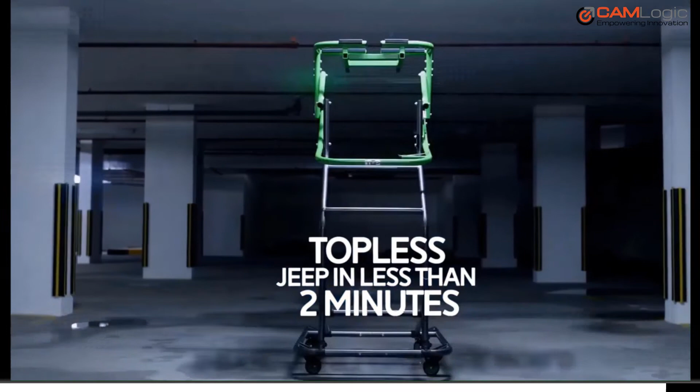To make this process less tedious and less time-consuming, I found this really great product that allowed me to essentially remove the hardtop in less than 2 minutes and then easily store it in my garage, all by myself. If you live in an area like me, where the weather can change daily, this is a great product to have flexibility in how you want to ride.

As many of you may have experienced with other products you've purchased, often you have a choice on the type of documentation you want to utilize in putting products together that require assembly. Today, you often have the physical, in-the-box hard copy documentation, or you can go online, usually on a mobile device, and utilize the digital version of the instructions. Those digital instructions can be either a copy of the physical manual, or you might even have video instructions from the company's website or even YouTube.

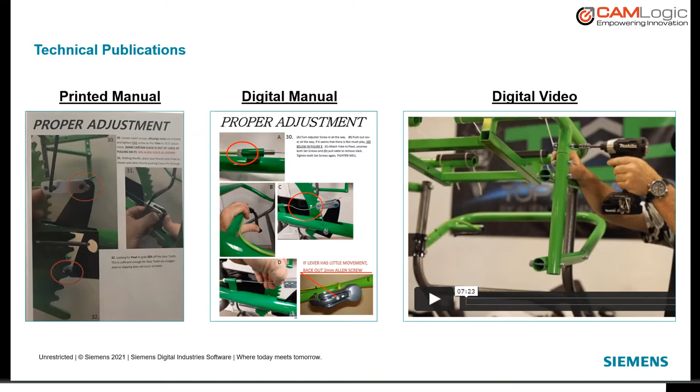And what I found was in this instance, I had access to all three. Unfortunately, each one was subtly different. If you look closely between the first two images shown, you can see that a design change was made in how the user adjusts the mechanism. It just so happened the version of the instructions I initially chose to follow were out of date, causing quite a bit of frustration during portions of the assembly process.

What happened in my situation is quite common. Oftentimes companies, in order to speed time to market, start the process of creating technical documentation earlier so that it will be ready when the product is ready. But changes made during late-stage design or change requests made during manufacturing can often result in differences between the product and its documentation.

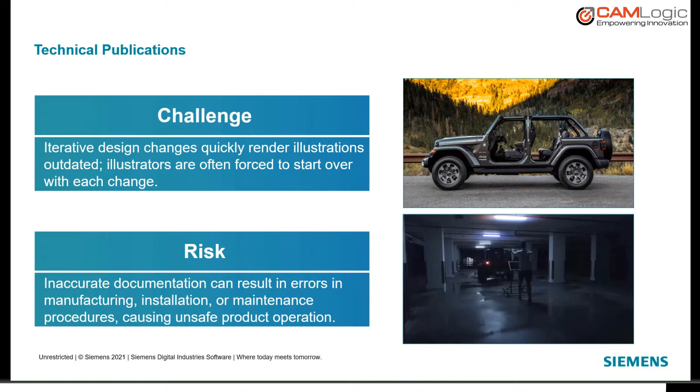For today's presentation, we want to start with some of the challenges that many companies face in creating technical publications. From there, we will briefly cover the digitalization portfolio that we offer with Solid Edge. We'll then take a deeper look with a demonstration of Solid Edge technical publications and how it interacts with Solid Edge CAD data. Finally, we'll cover the potential ROI of the solution, followed by a sample customer case study, and then wrap up with a Q&A session.

From a Siemens Digital Industries Software perspective, our customers are harnessing the power of digital technologies and the digital twin to transform their businesses. The digital twin means to design and test your products in a virtual world on the screen and correct your mistakes there long before you begin the manufacturing process. The value of the digital twin lies in how closely the virtual meets the physical world. And in today's competitive market, let's understand that a true digital twin is not an option, it's a necessity.

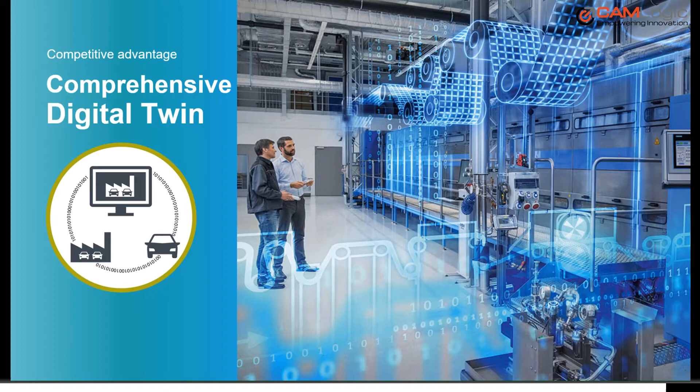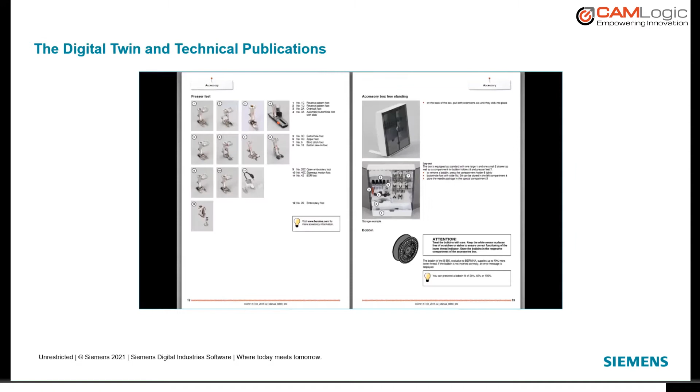Manufacturers are recognizing that clear, accurate images of parts and products are the foundation of high-quality downstream documentation. The challenge is it needs to be extremely high quality, but also done quickly. Unfortunately, quality and speed are often competing, sometimes to the detriment of a company's reputation and bottom line.

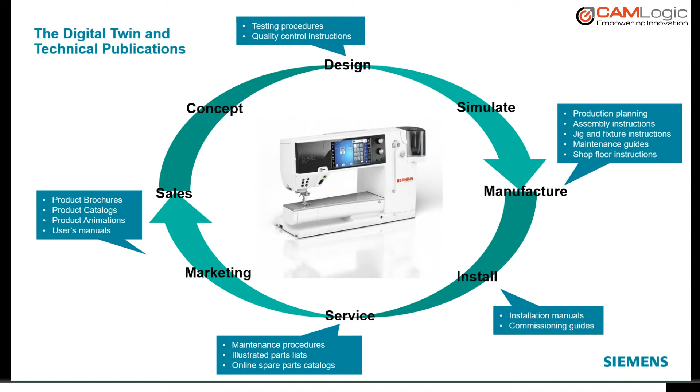And documentation is not relegated to just the design process. It's also necessary for manufacturing, installation, and maintenance procedures. In addition, the need for proper documentation for sales and marketing or in customer use is also critical and essential, not just for the performance of the products, but also for the overall success of the business.

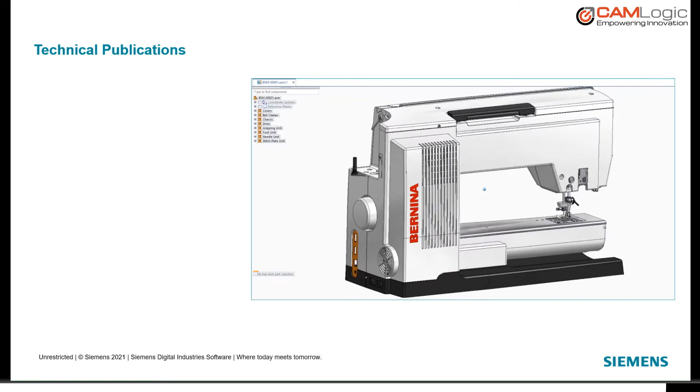The good news is for most parts and assemblies, 3D digital models are created as part of the product development process in the form of computer-aided design or CAD files. Unfortunately, converting those 3D CAD files into technical documentation can be a painstaking process that takes time and expertise.

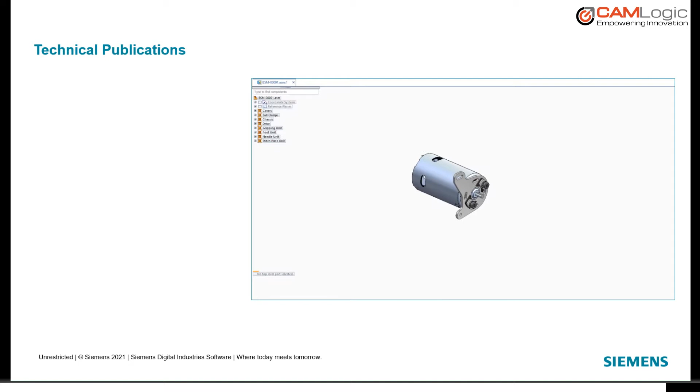The task of converting files and managing additional files for documentation purposes usually falls on the busy designer. Sometimes, instead of converting the files, the designer provides bitmap screen captures of CAD images with a specific orientation to be used as is or recreated by illustrators. All these projects take designers away from their day-to-day work.

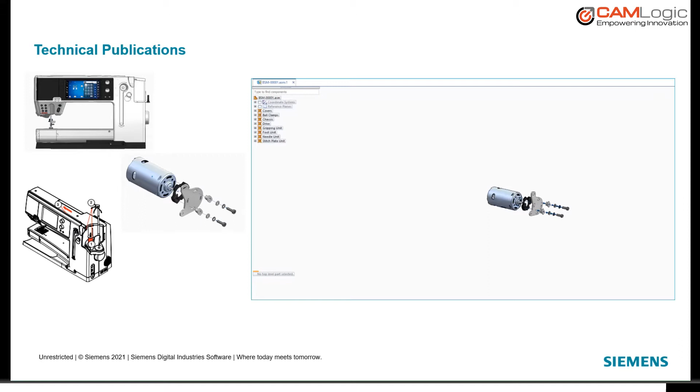To save precious engineering time and as an alternative to converting CAD files, some manufacturers are still taking photographs of a physical prototype to create graphical content. Of course, this means the prototype must be manufactured first.

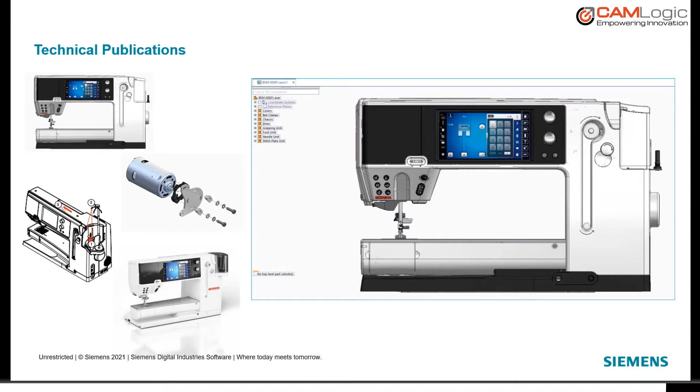While 3D models are an accurate source of product information, creating documentation is often one of the last steps in the product development lifecycle because of the need to ensure documents accurately reflect the final design of the product. But since the process of creating documentation can be so time-consuming, ship dates can be held up by documentation.

Ready-to-ship products sitting on the shelf because they are waiting on required documentation frustrates the design team as well as customers. Getting to market quickly can mean the difference between a competitive edge and lost revenue. And meeting customer milestones for product delivery can mean the difference between a profit and contractual fees.

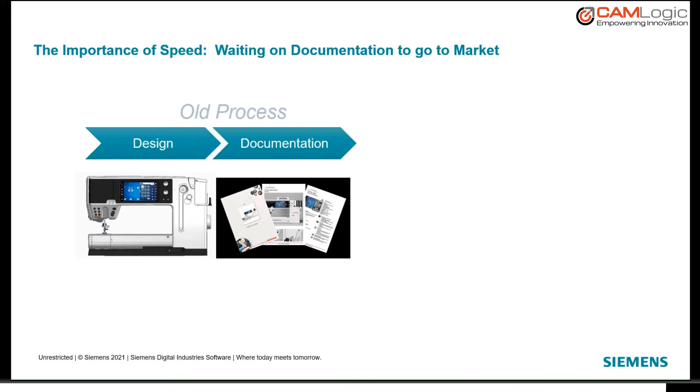The goal, however, is to have the ability to build publications and other documentation in tandem with design, and not only to build in tandem, but also to keep them associatively linked. This offers manufacturers several advantages: illustrators have more time to detail their work, and they don't need to worry about a design change down the road invalidating everything they're currently doing.

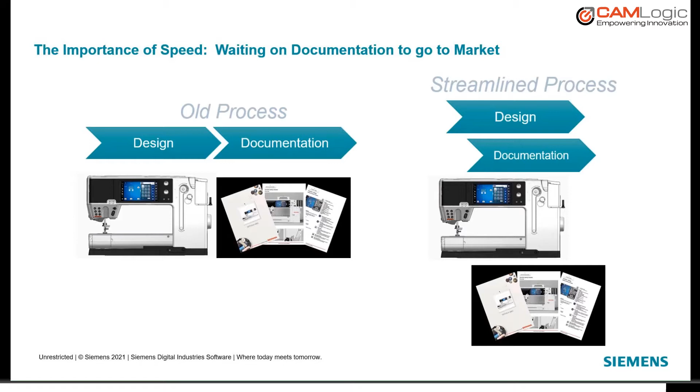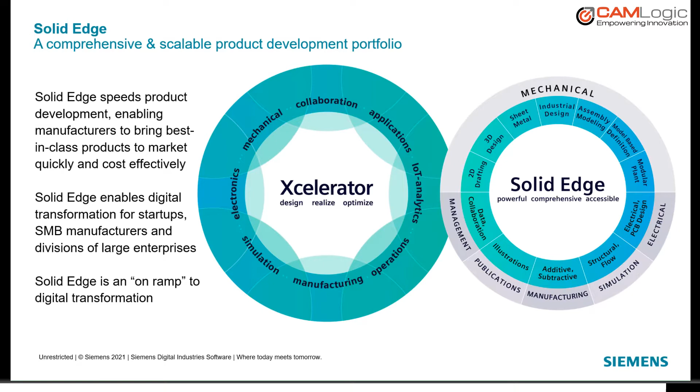Solid Edge is a key part of the Siemens Xcelerator portfolio and is focused on the requirements of small and medium-sized manufacturers. Solid Edge enables manufacturers to create a comprehensive digital twin of their products and includes solutions for mechanical design, electrical design, simulation, manufacturing, and as we're discussing today, technical publications. It also facilitates collaboration both within manufacturing companies and with external resources, including suppliers and customers. Solid Edge is the on-ramp to digital transformation.

Solid Edge Technical Publications offers a wide array of various capabilities, from single-page illustrations to entire sets of documents including interactive 3D views, text-based instructions, and Excel-style charts. Solid Edge Technical Publications allows customers to deliver customized documents, all while providing users options and flexibility on how they wish to work.

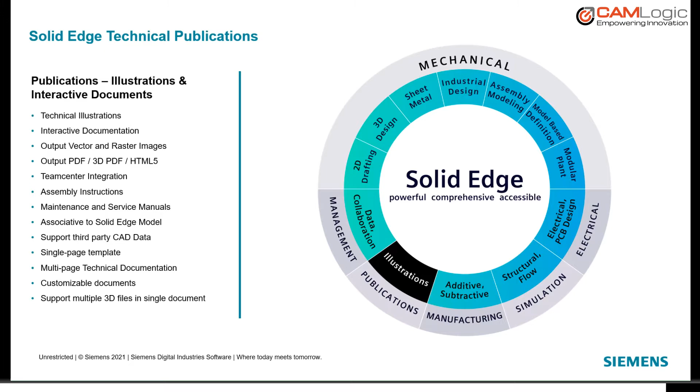In terms of workflows, Solid Edge Technical Publications is very flexible in how content is both created and accessed. Both Solid Edge users as well as non-CAD illustrators have the ability to easily create documentation. For the situation where the CAD designer is also the one creating the documentation, Solid Edge Technical Publications can be launched right from within the CAD interface. For non-CAD illustrators, Solid Edge Technical Publications can be launched outside of the CAD environment.

If access to CAD data is available, illustrators can insert it on the fly. If CAD data access isn't available, illustrators can still create documentation by opening a unique file that can be generated right from the CAD data.

Over the next few minutes, we're going to show the many advantages of Solid Edge Technical Publications. We'll start by showing the seamless flow of information from the CAD design right into Solid Edge Technical Publications. From there, we'll show the flexibility in taking that data and creating different types of documentation. We'll also demonstrate how changes made to the CAD data during late-stage design or change requests made during manufacturing are

automatically updated and reflected in the documentation. Finally, we'll show the end result of the final published documentation and the interaction the end user has in consuming the information in easy-to-read interactive formats.

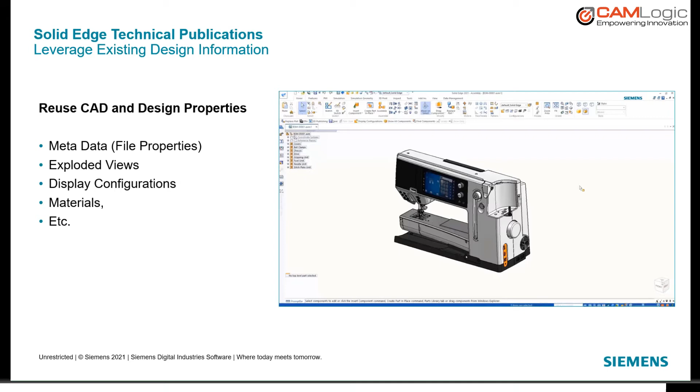Because Solid Edge Technical Publications automatically pulls features from the CAD information, engineers don't have to convert files, and illustrators don't have to manually recreate that data, which can include metadata, exploded views, display configurations, and more. This design information all flows seamlessly from Solid Edge to the Technical Publications tool.

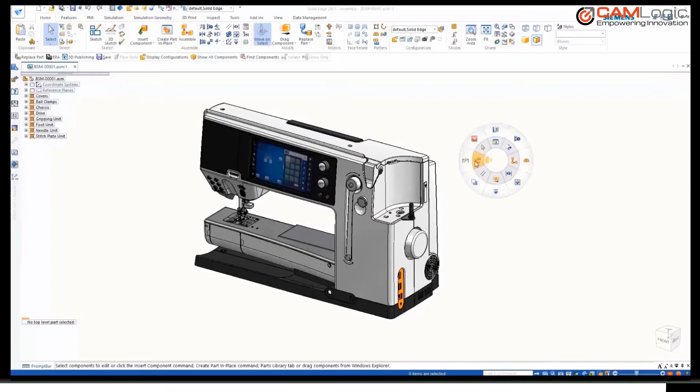Let's take a look at this sewing and embroidery machine designed in Solid Edge. Within the Solid Edge design application, saved views or display configurations make it easy for the designer to access what they need instantaneously without having to navigate through the component pathfinder. For example, if the designer wants to focus on the main frame and turn off the outer plastic components, they can do this quickly by selecting it from a shortcut.

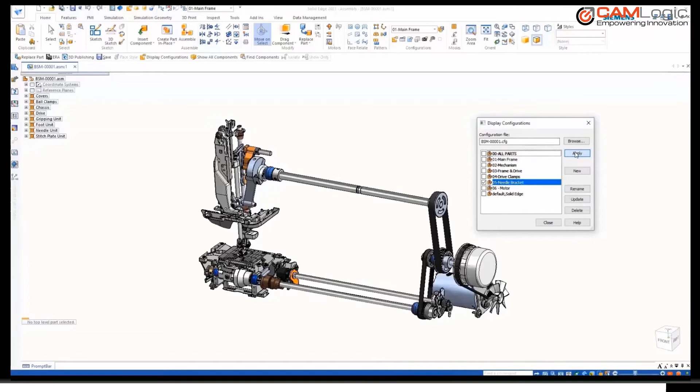Or maybe the designer needs to look at the motor for a specific task. More specifically, the designer can see the motor in its exploded state to see hidden parts or verify the order of assembly.

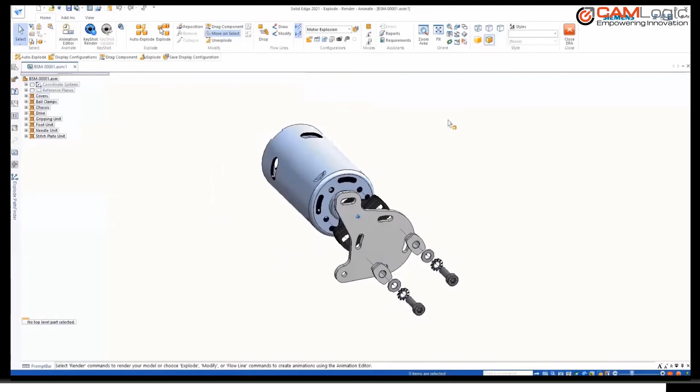And while these tools are important to the designer, they're also just as important to the person creating the documentation.

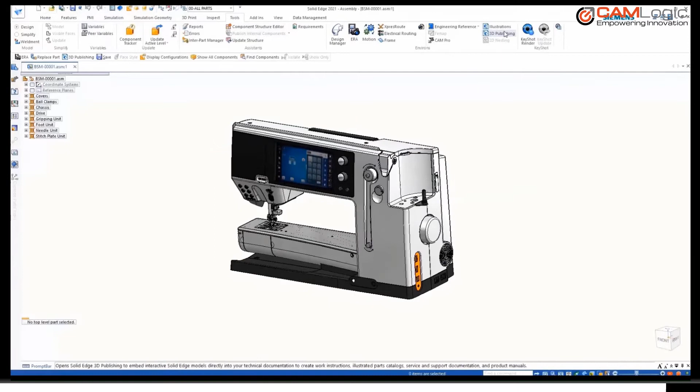We mentioned earlier that the task of converting files and managing additional files that must be created for documentation purposes usually falls on the busy designer who created the original CAD files. Solid Edge Technical Publications can be launched right from within the CAD interface. You'll notice all the display configurations we just looked at in the Design tool are available to access. In the case of the motor, you can see both the assembled and exploded states.

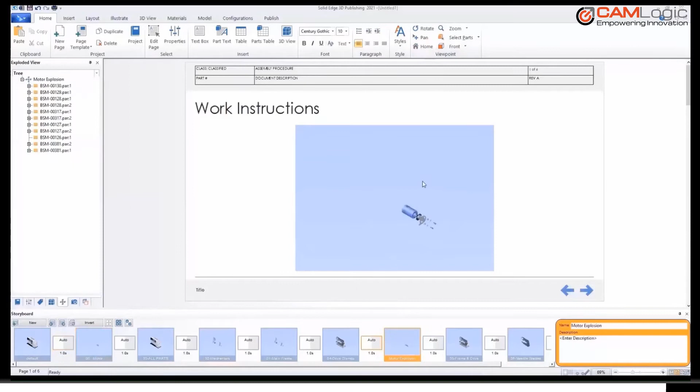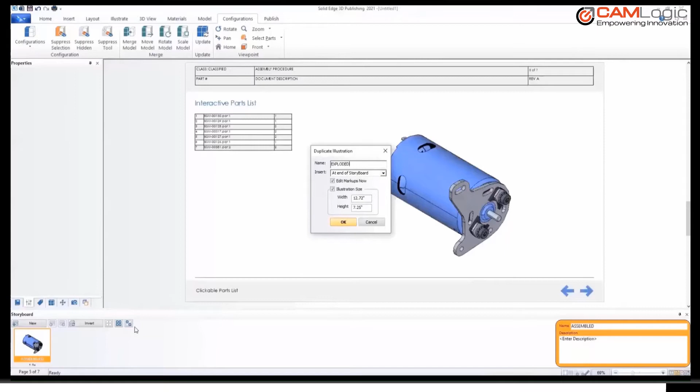Because Solid Edge Technical Publications is template-based, it is very easy to access predefined views or pages that contain the structure of what needs to be consumed. To make it easier for the consumer to see the composition of the motor, the illustrator may want to have a list of components as well as an easy way to quickly show the motor in both its assembled and exploded views.

To do this, the illustrator can quickly capture an illustration of the current assembled motor. This illustration can then be easily copied and pointed to the exploded view display configuration.

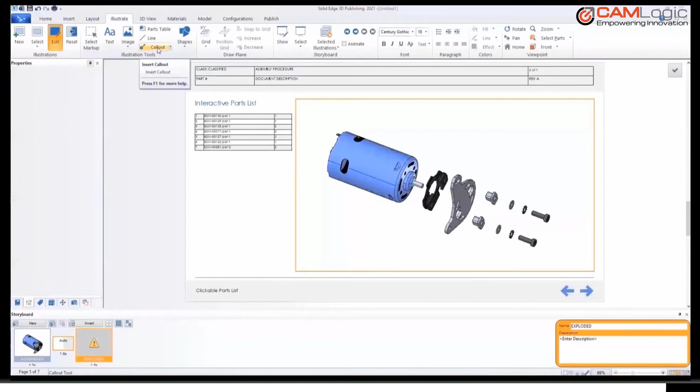To enhance the connection between the 3D design and the list of components, a callout or balloon can also be quickly added. The balloon can call out standard item numbers that reference the parts list or bill of materials, or it can automatically extract other relevant properties of the components, such as part numbers, materials, descriptions, or any other property you might typically see on a standard design drawing.

Another benefit is the cross-highlighting between the list of components and the 3D design that allows the consumer of the documentation to cross-reference the 3D model to its associated part number or any other property that was brought over from Solid Edge.

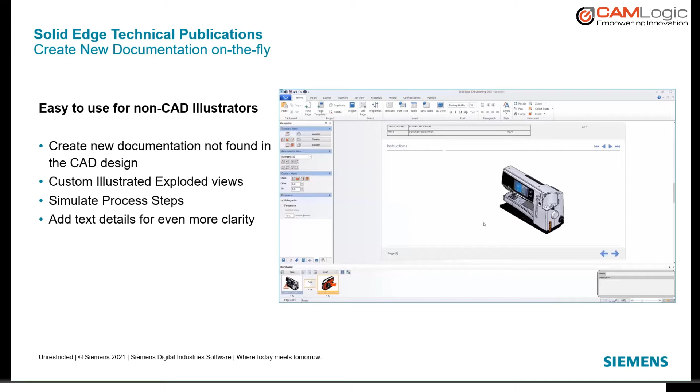So we just saw how technical publications streamlines the flow of information into the technical publications tool from the CAD tool. But let's run through a scenario where the documentation calls for instructions on how to repair or replace the motor, and let's assume the illustrator is not a Solid Edge CAD savvy person, or that the information doesn't already exist. In this example, we want to show how easy it is for non-CAD personnel to utilize the CAD data but have the flexibility to create documentation on the fly within the technical publications tool itself, and not have to rely on a CAD designer to create the appropriate display configuration or views they need to convey critical details.

To start, the illustrator will specify they want to create a new custom view, and in this case, they'll call it disassembly.

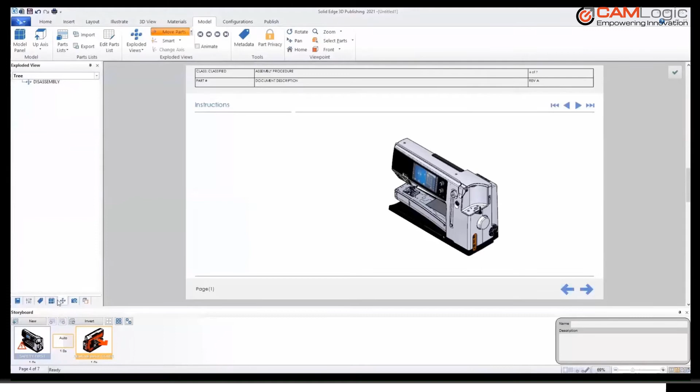Like in the CAD application, they can manipulate the views of the 3D design with specific zooms, pans, or rotations, or as an alternative, select pre-configured common views.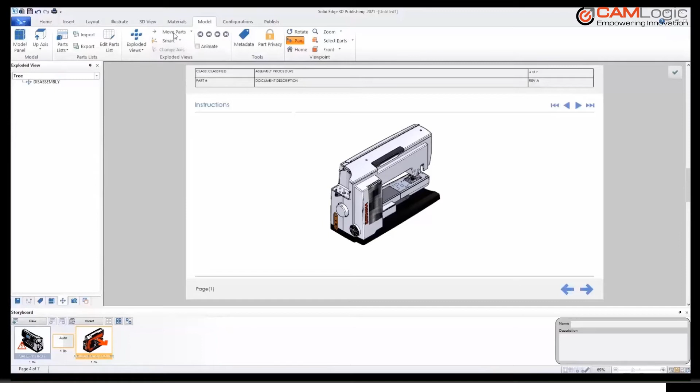To get to the motor, certain parts have to be moved or disassembled in order to gain access. Here you can see by simply selecting the cover, it can be moved out of the way to replicate the real-world first step of getting to the motor. Each time a part is selected to be moved, that process step is captured on the left-hand side of the screen in the exploded view tree.

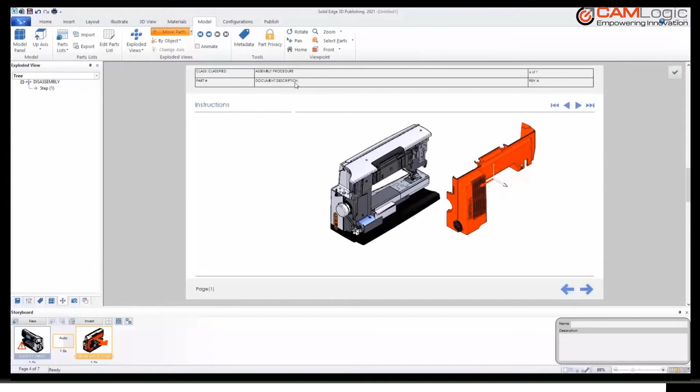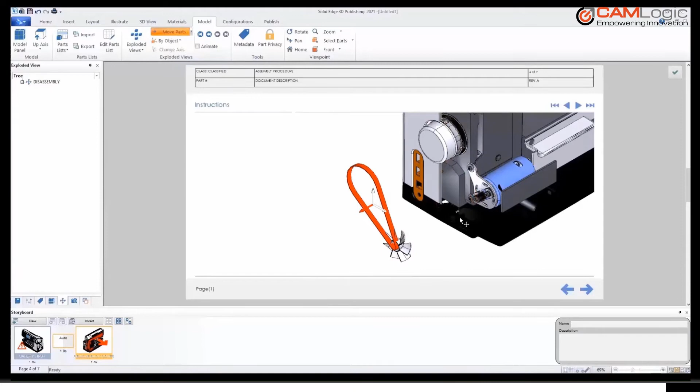This process will be repeated a few more times for other parts until the operator finally gets to the motor. Each of the 7 steps in the disassembly process are captured, and now a new storyboard, basically individual illustrations for each step, can be automated through a storyboard wizard.

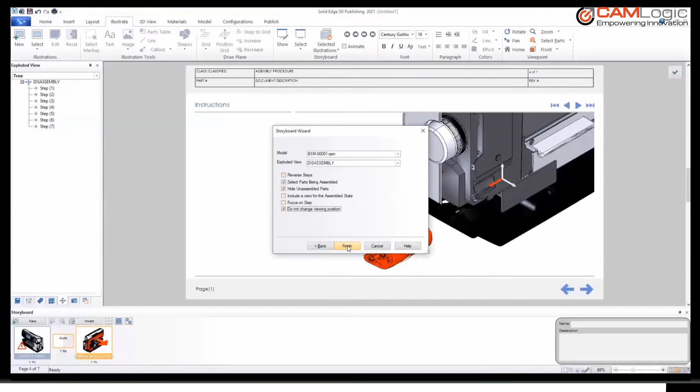Now that the storyboard has been created, the process can be simulated with on-screen navigation buttons built into the supplied template.

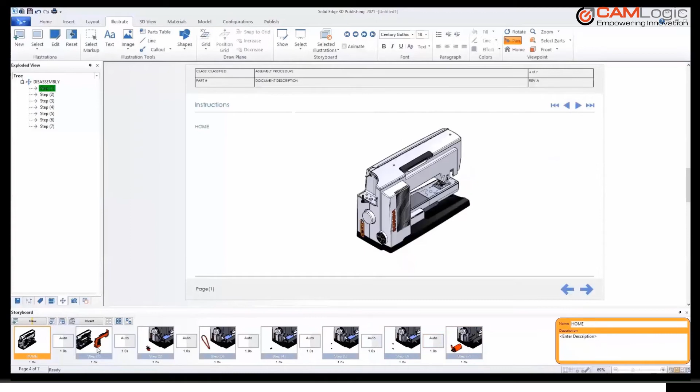In addition to having the process simulation with the 3D models, we may also want to include on-screen text instructions for even more clarity on what the operator needs to do for each step in the process. All the details for each step can be captured with specific instructions which auto-populates into the documentation.

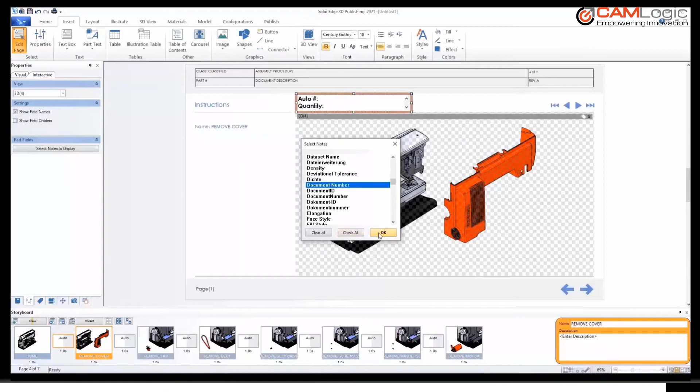To revisit the benefit of reusing design information brought over from CAD, now we'll show how part properties, such as part descriptions or document numbers, can be easily retrieved and displayed as the operator navigates through the different steps. Notice how the first step of removing the cover is going to show the highlighted cover's unique document number. As the process is simulated through the next steps, the document number automatically changes to reflect the appropriate highlighted part.

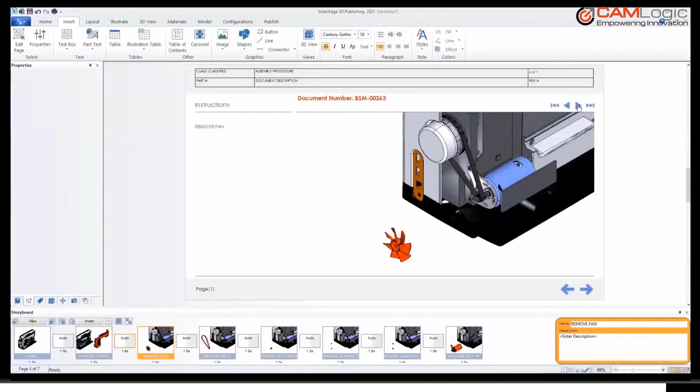Because you have to ensure documents accurately reflect the final design of the product, creating documentation has traditionally been one of the last steps in the product development lifecycle. However, with Solid Edge technical publications, the ability to not only reference but keep associative the 3D design in the documentation means late-stage design changes are not such a big deal.

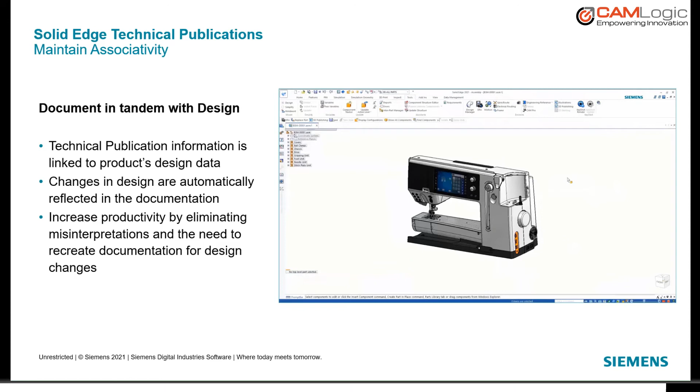In this example, a sheet metal bracket found within the motor assembly has been found to be insufficient for proper operation of the sewing and embroidery machine. Through the Solid Edge simulation application, it's been analyzed that by adding a couple of additional bends, the bracket will have the added stiffness needed to operate properly.

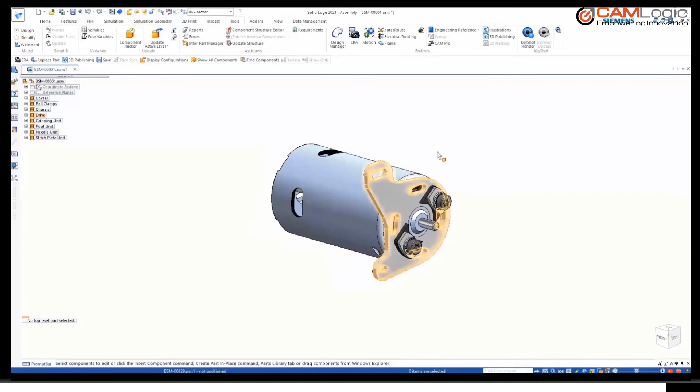The design change can be made on the fly in the context of this assembly, or as we'll show here, we'll presume the modification to the sheet metal bracket was already made, and we'll use a replace part option to insert the new design in place of the outdated one.

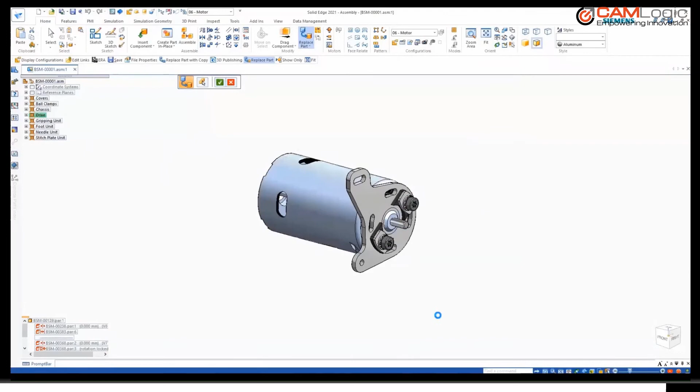After the change has been made in Solid Edge, the illustrator simply goes back to the documentation and hits Update. This ability to build illustrations and documentation in tandem with design, rather than after the fact, and keep it associative offers manufacturers several advantages. Illustrators have more time to detail their work and don't need to worry about a design change down the road invalidating everything they're currently doing.

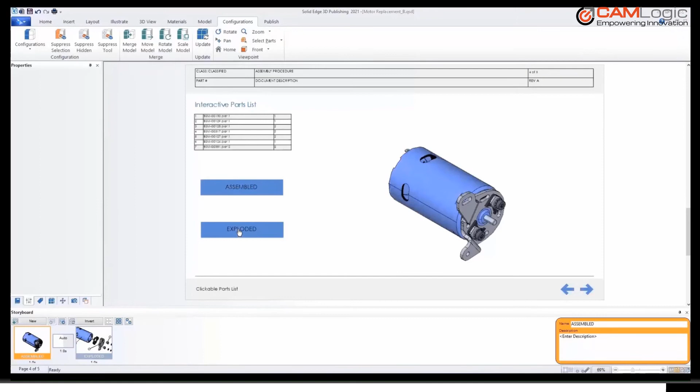This not only ensures that the documentation is correct and up to date, but it allows companies to get their products out the door faster and gain a competitive edge.

Solid Edge Technical Publications gives companies and customers another edge. You can build out and offer interactive, visual-rich web content and documents that users can easily manipulate and interrogate. Companies are no longer limited to delivering static documents like the user manuals of old. The difference between reading about steps needed to carry out a procedure and seeing those steps depicted in a graphical representation or animation makes a world of difference for manufacturing, service professionals, and consumers.

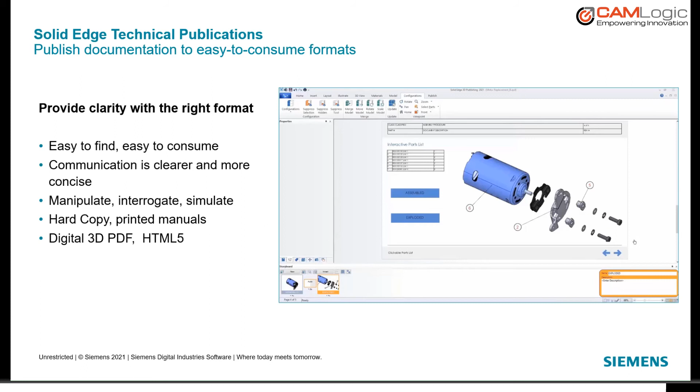When technical documentation is accessible in the format and on the device that users need, it can be easily accessed to clarify instructions and procedures, helping to avoid mistakes.

In addition to using the 3D design to create the documentation, there's also the ability to utilize or reference other documents as links within the current documentation. For example, the image seen here is a link to a video which shows maintenance instructions on how to clean the sewing machine once the motor has been repaired or replaced.

This will be shown momentarily, but first let's discuss some options on publishing the documentation. Once all the documentation has been created, the illustrator has the ability to publish it so that those on the shop floor, in the field, or even the end customer can easily access it in a common, easy-to-use format.

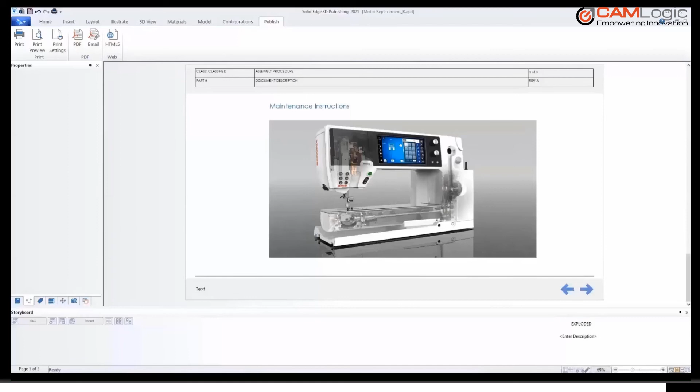Obviously there are print settings for those who may wish to have a hard copy format, but there are more popular digital formats such as PDF and HTML5 that can be consumed on a PC, tablet, or phone.

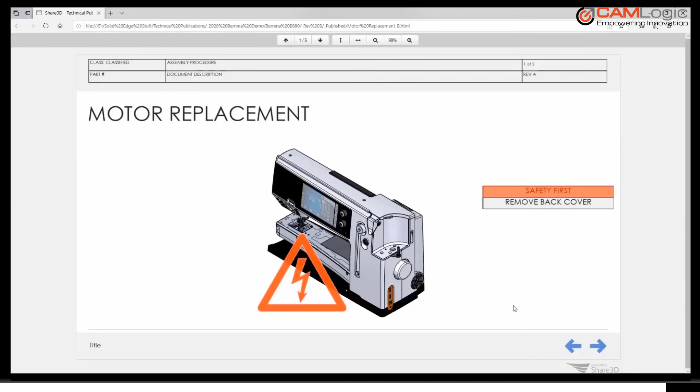If we go to the HTML version of the published motor replacement documentation, you can see how interactive the documentation really is. Like in the tool itself, simply clicking a button interactively changes the view, and as we navigate to other pages within the document, the consumer can click the next button to walk through the step-by-step process of the instructions.

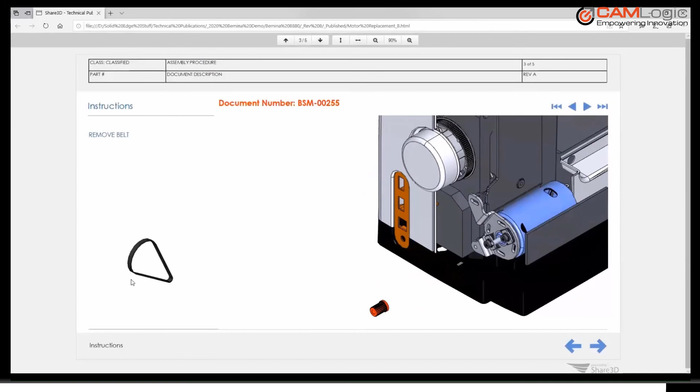In fact, the 3D design within the documentation can be zoomed, panned, or rotated for additional clarity if the consumer needs to look closer or get a perspective not offered within the documentation.

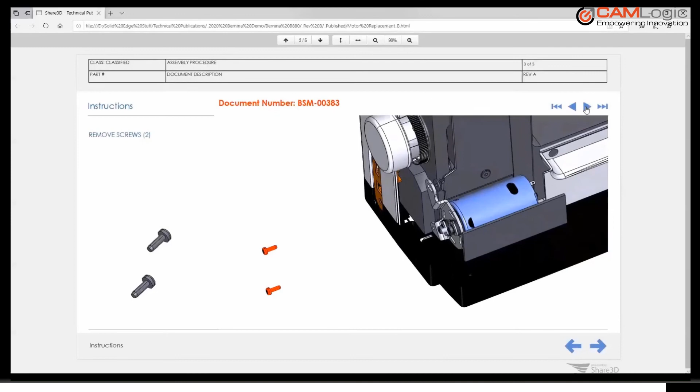The exploded and assembled views of the motor can also be toggled at will, and as mentioned before, outside links to videos or other files can also be accessed right from within the published documentation.

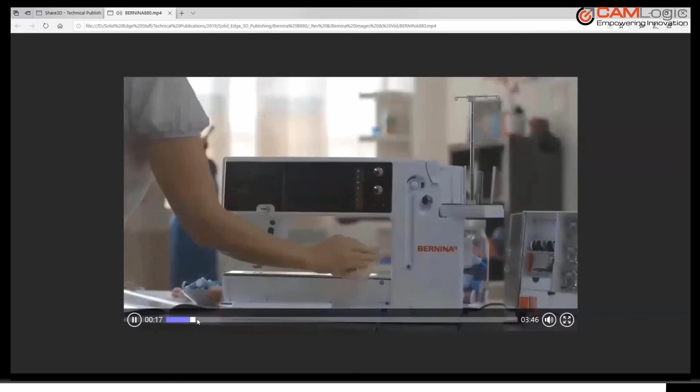Before taking a look at ROI, let's first review all the benefits of using Solid Edge technical publication software from a product development perspective, as well as the downstream benefits customers will experience.

First, let's look at less time - less time for designers to answer questions from other departments and manufacturing engineers creating the documentation. Next, reduced errors, because the documentation is associatively linked to the CAD design.

Interactivity - consumers have more clarity because the documentation is dynamic and not just static text and images. And let's not forget the downstream benefits with overall customer satisfaction with products being delivered on time. Products are also installed, commissioned, and maintained more correctly and efficiently, resulting in lower operating costs.

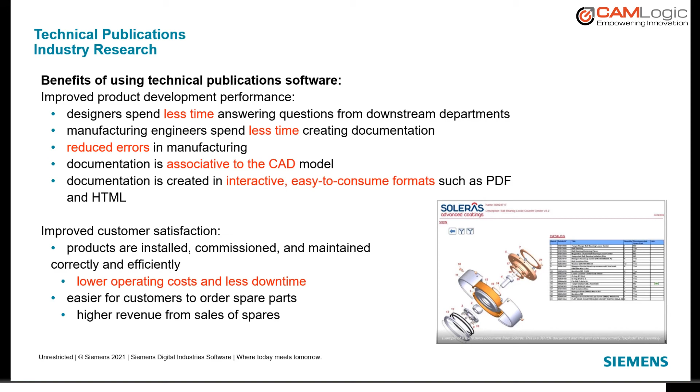Let's take a closer look at the return on investment. Let's use an example where we assume an average of about 6 hours per week spent by engineers creating technical documentation, often with traditional methods of copying and pasting from the CAD application into a Word document, or maybe even manually taking photographs and uploading those to their PC before inserting those photos into the documentation.

Let's also just assume that there's roughly a $60 per hour overall, or loaded, cost to the business when you consider employee benefits and other indirect costs.

For the example here of 4 engineers, if we can automate the documentation process using Solid Edge technical publications, you can typically save about 80% of the documentation time. That equates to a savings of about 19 hours per week, and for a team of 4 engineers, that's going to generate a huge cost savings of roughly $55,000 per year.

Even if you reduce this down to 1 engineer, the efficiency gained by using Solid Edge technical publications allows for the software to pay for itself in the course of the year.

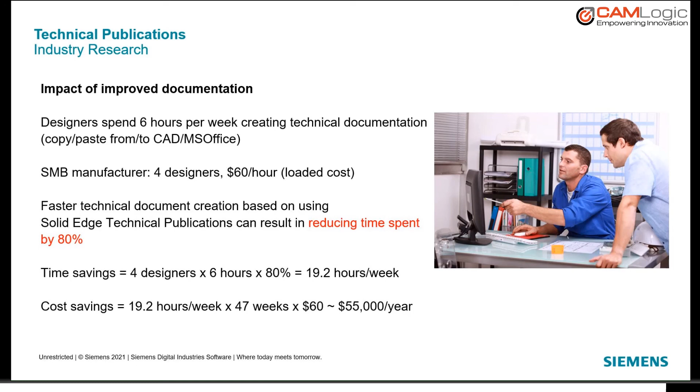Soleras is a global company that manufactures coating equipment in locations such as Belgium and the United States. Previously, they used Microsoft Office software, but they had poor, inconsistent documents, which made it difficult for their customers to find spare parts. Among various types of documentation, Solid Edge Technical Publications allows them to create interactive spare parts catalogs.

They're able to eliminate the need to print and mail documents, which saves them thousands of dollars every year. And it becomes easier for customers to find those spare parts, which means increased sales. Reduced costs and increased sales all add up to increased profits.